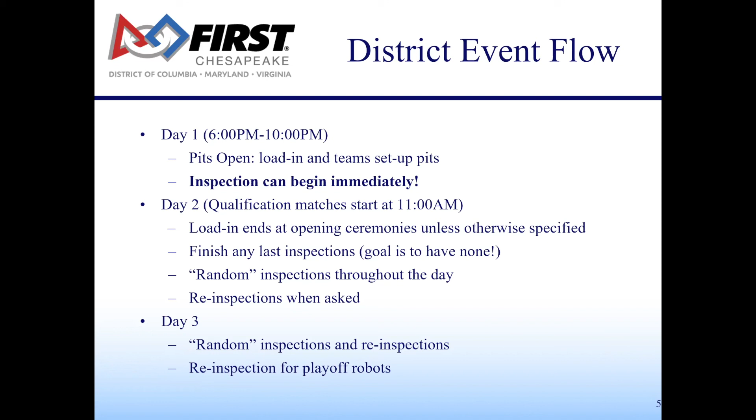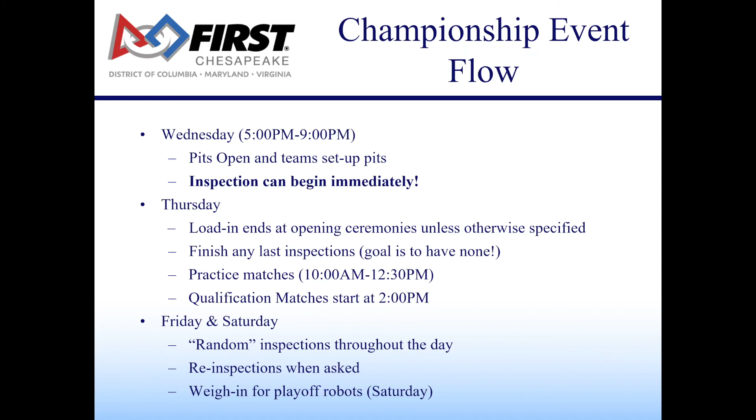For the championship event, the flow is very similar with the exception that it's an extra day. Pits open at 5, you can inspect immediately. The load-in ends are always at opening ceremonies. We have our practice matches from 10 to 12:30, and then we have basically the same process through the others.

The key points, things that I like to emphasize as much as possible: first, please start the inspection early.

One of the nice things about the no-bag rule is that we don't have to wait until the event to inspect the robot. I'd love to have teams reach out and see if we can't get some on-site inspections.

One of the things I'm hoping to advocate for next year is more inspection days like we had two years ago. That was an amazing experience for everyone involved. We had everyone there, were able to work out problems with teams, and it gave me the opportunity to train my inspectors. So the hope is we'll be able to continue to do that.

Chesapeake District was one of the most forward districts on that type of inspection. When they opened early inspections about two years ago, we had the most teams pre-inspected by far. To be clear, pre-inspection just means we look at it—there's nothing about the process that lets us speed up anything during the actual event. It just means that if there's a problem with your robot's frame, or any other type of compliance issue, we can look at it very early. So reach out—my email was at the beginning of the presentation, and I'll make sure Don gets this slide. Just do what you can.

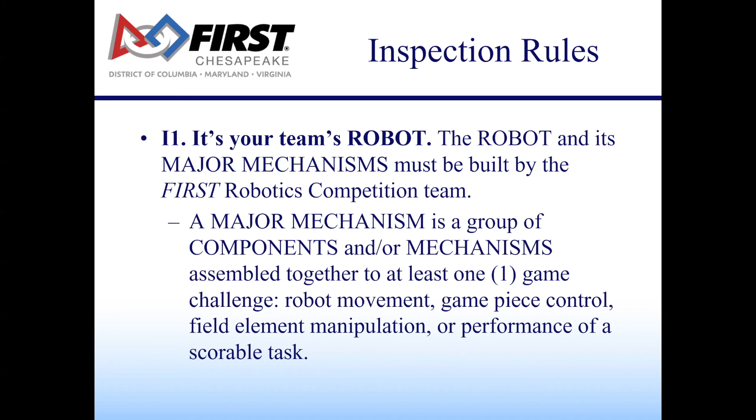This particular rule has caused a lot of consternation in the past, and my philosophy is that it's not there to prevent teams from helping each other. If a team needs help, like happens every year, they get swarmed by other teams there to help, and I love seeing that good work. The end result is a mechanism comes about, and I'm not going to demand who worked on it or what happened. What I don't want to see is a team with an array of literal scoring mechanisms coming over and saying, 'Okay, you're on an alliance, bolt this to your robot.' That's what I1 is intended to prevent.

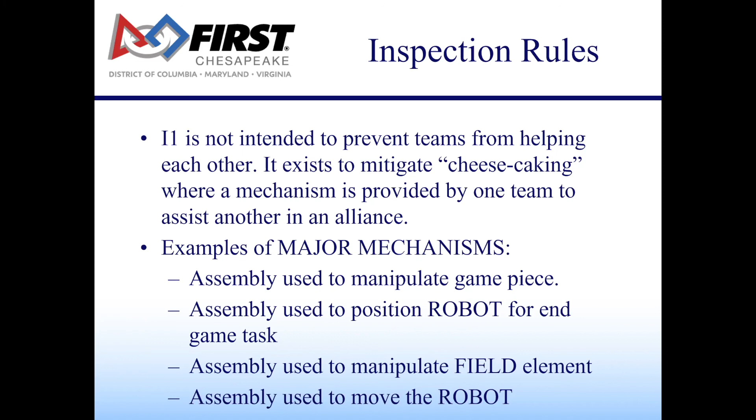There are some examples of major mechanisms. Things that are not major mechanisms include gearbox assemblies, COTS items, and any subset of a major mechanism. If you try to exploit a loophole, that's still a violation of I1. If you give someone a box of parts and say 'put this together' and it forms a major mechanism, that's not going to work. Realistically, this is mostly self-reported or seen by other teams, and as long as you maintain the spirit of the event—not providing complete assemblies to other teams, but instead helping repair the robot or working together—that's fine.

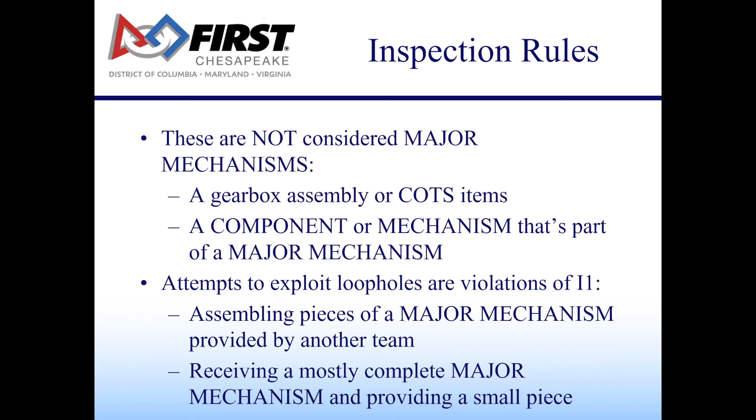I3 says bring it all to inspection. Sometimes, not often, we see teams with different configurations on their robot—a series of mechanisms that can perform task A or task B. What I3 basically says is any robot up to 150 pounds can be inspected at once, in any combination of mechanisms. As long as that 150 pounds of robot mechanisms is inspected, they can be used together. Now, any configuration you actually use has to weigh less than 120 pounds.

If I know that configuration A and B together weigh 120, but configuration B and C weigh 135, and I see you with configuration B and C, then that's going to be a violation and probably very bad for your team, because you'll be playing with a robot that wasn't accepted or hasn't passed inspection.

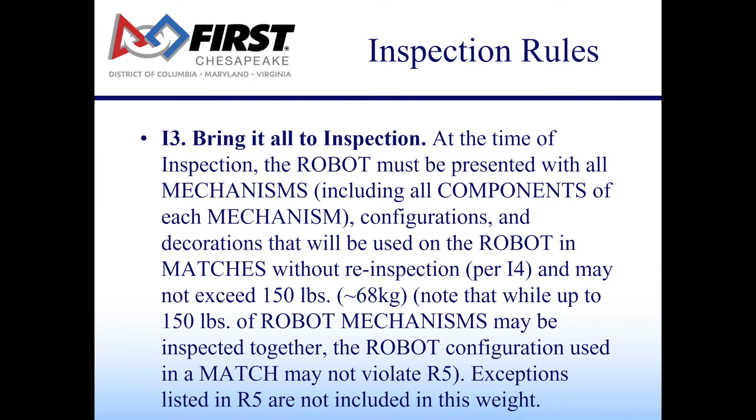But the goal here is to try to minimize the amount of hassle that we have going on. If it's been inspected within that 150 pounds of inspected items, then you can add it, remove it, reconfigure. You're fine.

If you modify your robot after your most recent passed inspection, please call us over to reinspect. When we say modify, we mean significant changes to the robot, physical changes, like drilling holes or changing mechanisms for new ones. If you're using fasteners, markings, or doing an identical replacement, that's not a reinspection—that's a repair. Also, please only bring one robot to the event.

If we see more than one, then we have to take one. So, the initial inspection process.

First thing we do: you bring the robot over, you remove the battery and the bumpers, you put on all your mechanisms, and you weigh it. We weigh the bumpers individually, add all the mounting hardware. Please don't step on the scale—the scales are older than most of our students at this point.

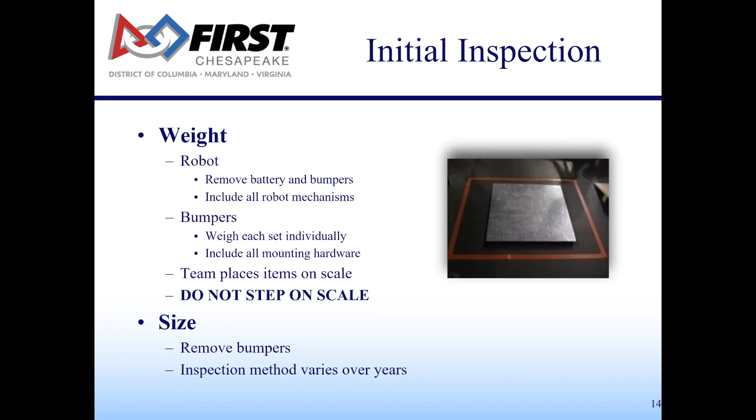For sizing, usually it's without bumpers. Whatever the method is, we deal with it. We try to have a box or something available so we can just kind of visually check it and move on quick. After the initial inspection, we move on to the pit.

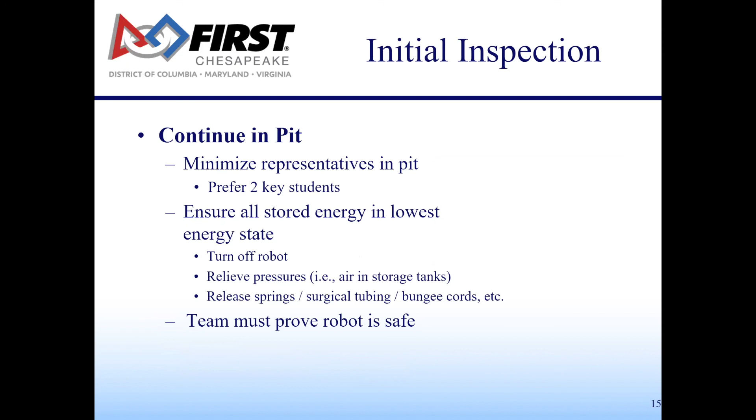We try to minimize how many representatives are in the pit. Ideally, we'll have about 2 students. We want to make sure the robot's in a safe condition, so we turn off the robot, minimize all the pressure, and put it into a low energy state. Once you have proven that the robot is safe, then the inspection can begin.

Bumpers are always fun. I don't know what it is about teams that can make these amazing robots with advanced programming that can't do plywood and pool noodles, but it always seems to be a challenge for some teams. But it's part of the robot. I don't think FIRST is going to go near any events that don't require bumpers anymore. They're here to stay. They're never going to go.

The construction's very simple: 3/4 inch plywood, pool noodles, that nice durable fabric cover, and then a proper display of the team number.

I find a lot of times that with a team that has a good robot, if they felt kind of rushed, the bumpers are usually the last thing to think about. And often that leads to something that's not necessarily the most securely fastened and easy to remove. For me, securely fastened means that when I move the bumper, the robot moves with it—there's no play.

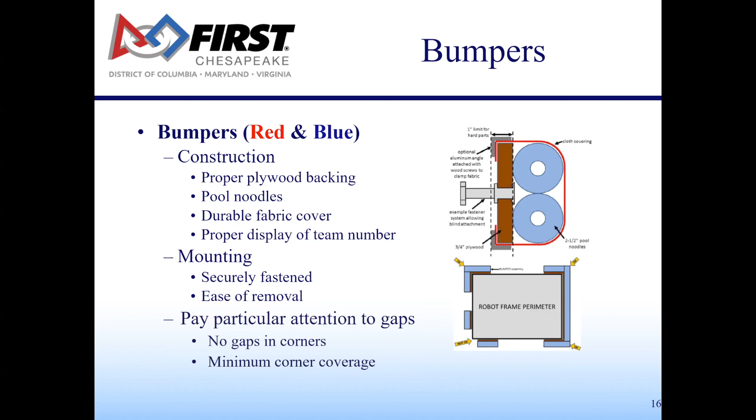Also, every year there's been rules about gaps in the corners. You're not allowed to have them, and there's a minimum 1/4 inch spacing or a maximum 1/4 inch backing between the robot and the frame perimeter. So if you can keep an eye on those things and check it aggressively, that'll be best for you, because bumpers are often very hard to fix due to the way they interface with the frame.

They're not an afterthought. They're mandatory. Your bumper can fail your robot just as easily as the rest of you.

Try to avoid bumper covers or convertible bumpers. Very rarely do I see them done well. I know that FIRST has done a pretty good job of changing the rules so that if a thread from a bumper is touching the floor, it doesn't disqualify you anymore. But the bumper system as it is right now, with the 2 swappable configurations, is pretty good, and the more you can maintain that, the better.

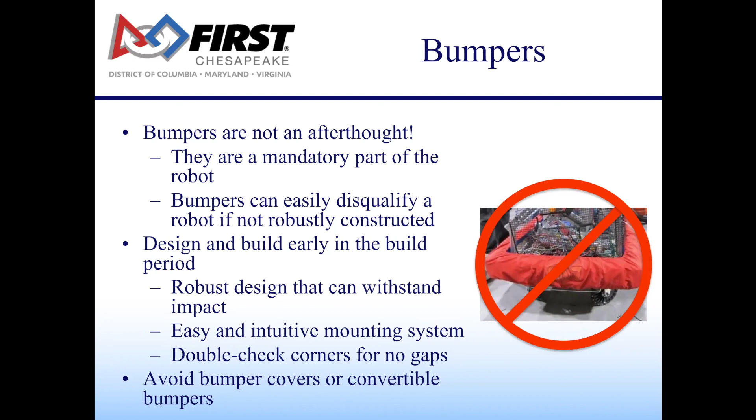Next up, we have mechanical inspection. I'm a mechanical engineer, so this is my favorite part.

The bill of materials—please have one ready. Honestly, my favorite thing is to just say, have it on Google Drive and share it with all of your students, so that when I say, hey, where's your bill of materials, no one's panicking. Someone just looks it up on the phone and shows it to me. I verify that it has the cost of materials, and I verify that it has the proper allocation of everything, and then we move on.

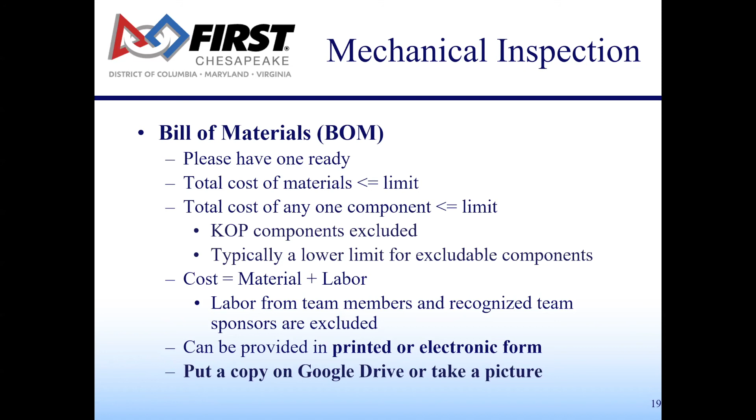These robots are pretty complex, and I'm just not in a position where I can perfectly analyze your bill of materials, but it does need to be there.

For me, the big things I look at are the hazards. So the first one being sharp edges and protrusions. I look at hazards to personnel or fields. I look at leading edges. I look at points. I look at undersides. My personal favorite are the improperly cut tie wraps that always like to demand the sacrifice of blood.

And I'm also a really big fan of looking at areas of concern. Any part that interacts with the game piece. If there's a part of the robot that can puncture or is designed to interface with the field, I'm going to be pretty careful about that. Anything near the breaker is of concern, because that's the thing that theoretically someone is going to be reaching towards in a panic. And if it's in an unsafe location, then we'll have to fix that. And then obviously near battery connections, because we want to make sure that there's no electrical hazards.

Another area of concern that we've had recently is the underside of the robot. On all of my inspections, I will make sure that the robot is lifted up so that I can look at the underside. I don't want to see any bolts sticking out. I don't want to see anything that's going to catch a field element. There's a 120-pound robot with a 1/4-inch bolt sticking out of the base. If that catches something like a cable line and it rips it open, the field could go down for a sizable period of time.

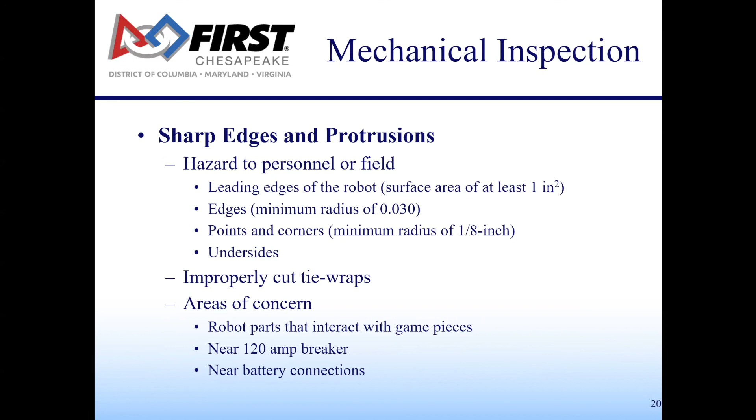Energy storage is critical. There's one approved battery or one approved style of battery. That's the only one you can have. If you're going to do any type of elastic energy, spring, surgical tubing, bungee cords, make sure they're properly contained. Your storage tanks need to be safe, and everything has to be safe to be around.

For batteries, I love to use either a 2-inch cinch strap or some type of secure battery tray. My philosophy is, if I can take the robot and turn it upside down and shake it and the battery doesn't come out, then you're good. No one wants to see a battery on the field. Please be careful about protruding bolts or other items that can damage the battery.

A couple of years ago, we had a team that had a battery case with 2 bolt heads that were in the battery region. And what happened is, when they installed the battery, the battery itself was actually resting on these 2 bolt heads. They were rounded, but it created a bit of a lever. And as a result, whenever the robot dropped, it actually started cracking the battery. And by the end of the match, all 5 of their batteries were leaking, which was a record for me. I went from having never dealt with a battery leak to having 5 in a single event, and that was great.

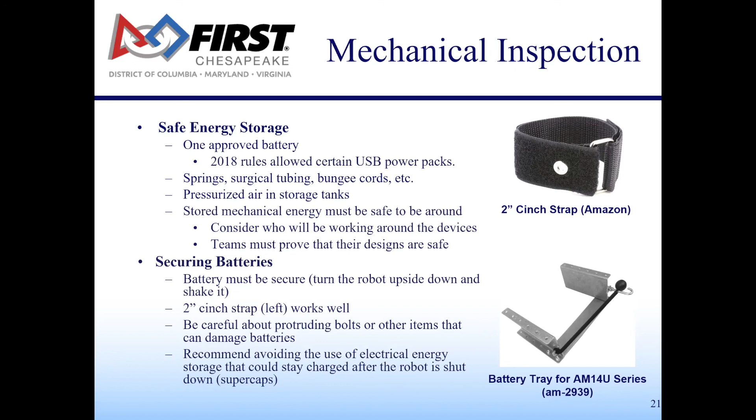If you happen to use any capacitors, please avoid having them be charged after the robot is shut down. Pneumatic storage. I am a huge advocate for properly and rigidly securing pneumatic storage tanks. I don't like seeing them flop around. Please avoid using cable ties or tape. You can't use tape because it's illegal in pneumatic components, because that's the rules. Cable ties have a tendency to stretch.

I'm a much bigger fan of seeing things like brackets or mechanical, physical restraints, as opposed to something that can stretch. Please don't use things like hose clamps that'll cut into the storage device. If you're using a lot of air, you don't have to use a Clippard tank.

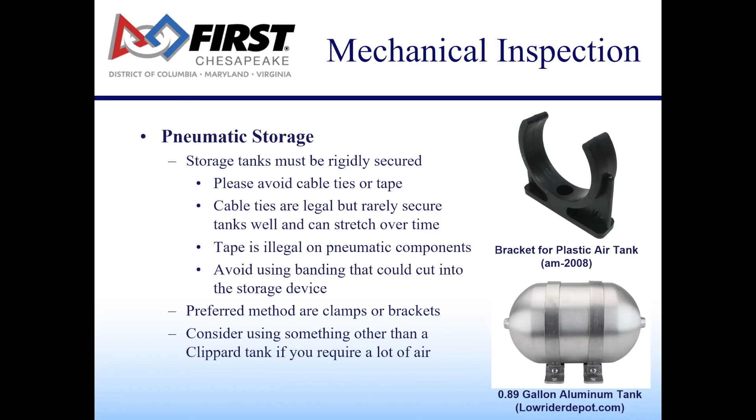One of my favorite things is to look at a website like lowriderdepot.com. I just found this place a few years ago, and they have these aluminum tanks that they use for things like the pneumatics on a car, and they actually hold more air for the weight than an equivalent Clippard tank, because they're aluminum. They're various sizes, but they're a lot more efficient, and they have these nice physical brackets, and they have multiple mounting ways. So if you're going to use a pneumatic system, consider thinking outside of the Clippard tank and seeing what other options are available.

Some mechanical recommendations: please clip your cable ties as short as you can. Every now and then I have a team that thinks it looks really awesome to have their cable ties cut at a 45-degree angle, and it bleeds. It makes me bleed. Just have your students run their hands over every part of the robot, and anything that feels sharp, just file it down.

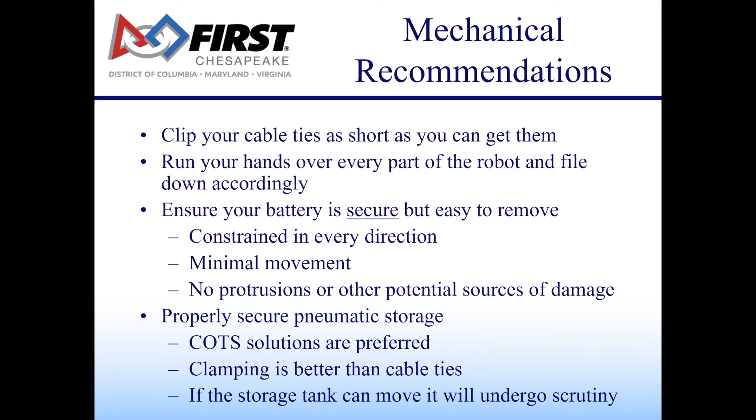The battery, please make sure it's secure but easy to remove. Constrain in every direction, minimize movement, just don't have any protrusions or potential sources of damage. And please secure your pneumatic storage. Ideally a COTS solution. Clamping is better than cable ties. If the storage tank can move, it'll undergo scrutiny.

Ballast. We haven't had a lot of ballast recently, but if you need to have ballast, it has to be in compliance. That means it can't be an additional battery and it can't be a threat to the field. So no uncoated dive weights. That's actually more of a thing in Florida than around here. No exposed lead. And try to avoid things like containers of loose fasteners or ballast.

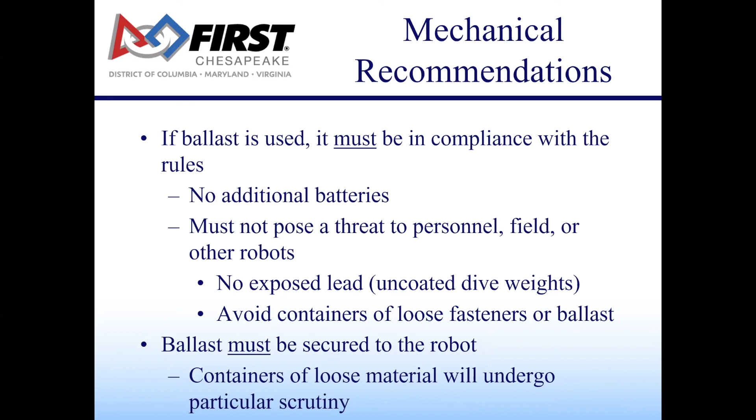I forgot which event it was, but someone had a glass beaker full of lead shot at one event, and that was a no. If you have ballast, it's got to be secured to the robot.

It shouldn't be hidden. Just design for access, in case a stranger has to deal with it. At the same time, consider the potential for what other robots and the game pieces can do to disable your breaker. If this is a game where balls fly all over the place and can land on your robot, then a breaker prominently located at the top that could be turned off may not be the best thing in the world, or you could shield it somehow.

The robot radio, just get it programmed immediately so that that's not an issue. Try to mount the radio high and away from metal. Please don't clamp the radio, for example, with cable ties. Depending on the radio, there may be a very thin margin between the grounded plate that forms the antenna region and the board itself. And if you compress it too much, you can cause a short.

We've had a lot of success with adhesive hook and loop tape. If you do have to use cable ties, and I'm not saying you can't, just don't encourage your kids to clamp it down mercilessly. Try to make sure that it has at least a little bit of give. Previously, there's been issues with radio power. You can use both a barrel adapter and power over Ethernet. I highly recommend power over Ethernet.

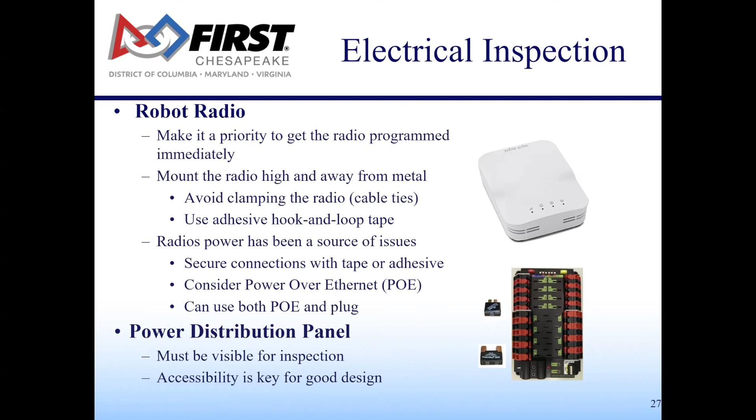Electrical inspection with custom circuits. Any component of the robot other than the listed ones is considered a custom circuit. Any active electrical item that is not an actuator or core control system item can't produce more than 24 volts. They can't directly alter power pathways. So for example, you can't put a custom circuit in between the motor and a wheel, or in between the power controller and the motor.

You can monitor voltage or current, but you can't directly control motor controllers or relays. It can be connected to the CAN bus, but it can't interfere with, alter, or block communications among the control system itself. If you have a remote camera that broadcasts a Wi-Fi capable signal, it has to be pre-approved by FIRST. It's better just to not have that happen.

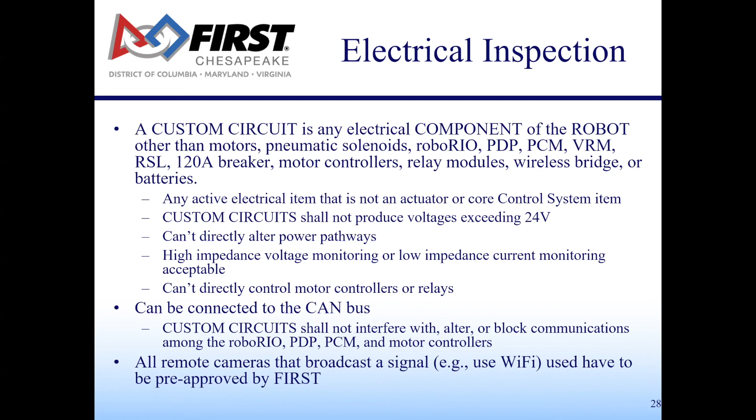Electrical recommendations: the best thing you can do is have clean, well-labeled wiring. It makes it easy to inspect and easy to troubleshoot. I like using the Anderson power pole connectors - they're pretty reliable, they have nice little clips, and they're easy to pull apart.

I recommend using low gauge wire. Just because the system says you can use 12 gauge wire doesn't mean you have to. I like using 10. McMaster Carr sells something called Easy ID low voltage cable - it's a red and a black wire already bonded to each other. If you're going to do battery wire, there's no reason to just use 6 gauge - maybe go 4. There's an ultra flexible battery wire also from McMaster, which works really well.

During your own self-inspection, look at every single connection you have and pull it just to make sure nothing is loose. I like using perforated plastic sheeting for electrical mounting. McMaster Carr sells high strength PVC plastic perforated sheets - that's sheeting about 1/8 of an inch thick with a 1/4 inch hole every inch or half inch or so. It's easy to mount components on it and adjust as needed.

And if you've got 50 bucks lying around, consider getting a hydraulic crimper. It will absolutely bond the daylights out of your components and make it a lot harder for them to pull out.

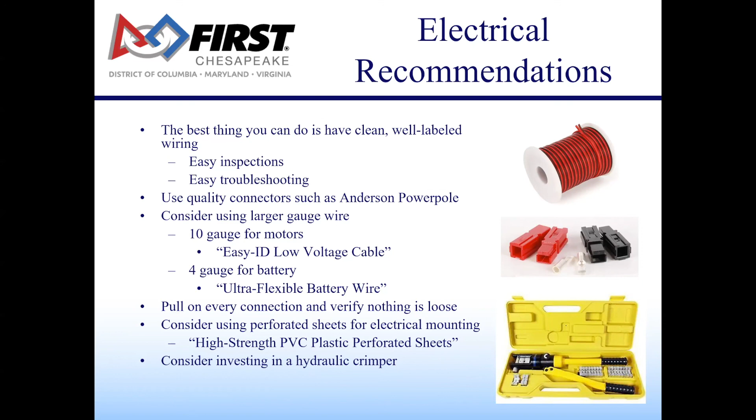Regarding electrical recommendations, please avoid making any assumptions when it comes to motors, solenoids, or custom circuits. Use Q&A, feel free to email me. Pre-inspections are great. A good example is automotive motors, although I'm not sure how much that's an issue nowadays, but every now and then I run into someone who says they have an automotive motor. The bottom line is I will require evidence that the motor is actually for automotive use. It can't just be a motor that is also possibly used for automotive use - it has to be a motor that is actually used for cars.

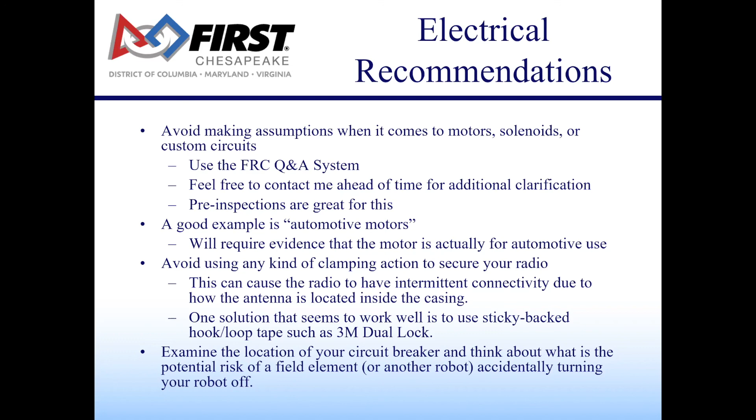Just try not to clamp your radio - again, I like using Velcro. And with the circuit breaker, again, think about what would happen in an emergency situation. How quickly can a stranger turn your robot off?

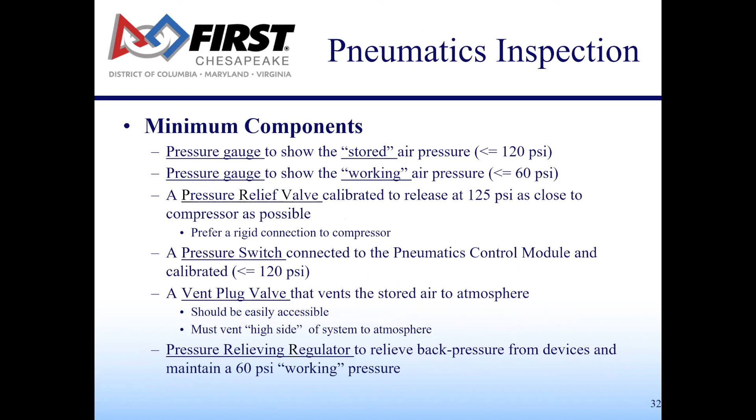Pneumatics - everyone loves pneumatics. The minimum components of the pneumatic system are a stored pressure gauge, a working pressure gauge, a 125 psi pressure relief valve, a pressure switch, a vent plug valve, and a pressure relieving regulator. Please do not modify your pneumatics. You can remove mounting pins from the cylinders of a pneumatic cylinder. You can modify the wiring connected to the control system by adding a connector to it. Please don't paint or tape over components.

Compressor: any type of compressor is allowed if it meets the specs - just show me the documentation. The kit of parts compressor is typically undersized, it's only 0.88 CFM versus a limit of 1.1.

Note that if you have a lot of air flow in your system, you can cause a lot of heating. I think it was the Andy Mark 1.1 CFM compressor - I was doing an event 3 years ago where the compressor was working so hard that it melted the plastic tubing it was connected to. It actually caused a little hole that caused a pressure release.

You can only have one compressor. It can be off board, but it must still be controlled by the robot, and the minimal pneumatic system must still be on the robot.

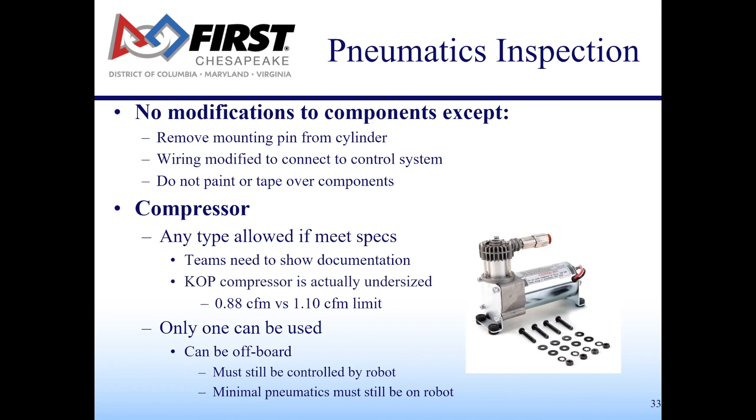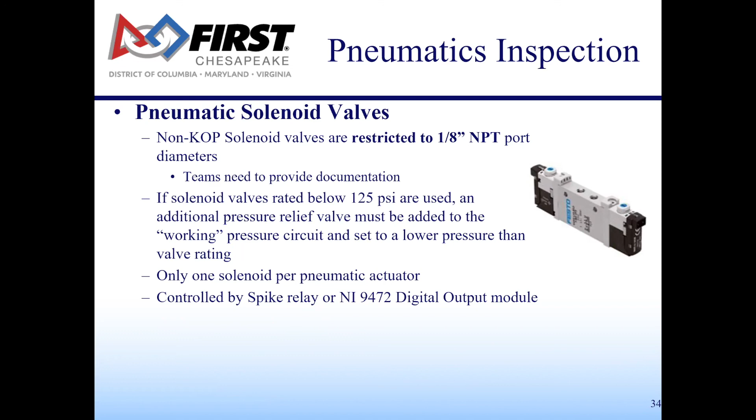I highly recommend performing your pneumatics check before inspection. Check that the high pressure shows less than 120 psi. Check that the working pressure shows less than 60 psi. Make sure the compressor stops at 120 psi. Verify that the pressure relief valve works.

Short the leads of the switch and make sure that the pressure relief valve relieves at no more than 125 psi. I highly recommend using a static pressure relief valve like the McMaster Carr model shown there. If you use that, then you don't have to worry about setting it - you just put it into the system and it runs.

Try to treat your pneumatics like an electrical system. Cleanly lay it out and label your tubing. The easier it is for me to inspect, the easier it is for you to troubleshoot, so try to simplify as much as possible. That aluminum tank I showed previously was the equivalent of six Clippards. Make sure your gauges, regulators, dump valve, relief valve, and switch are all easily accessible. Gauges in particular, because during events I frequently check them to make sure your working pressure is less than 60 psi.

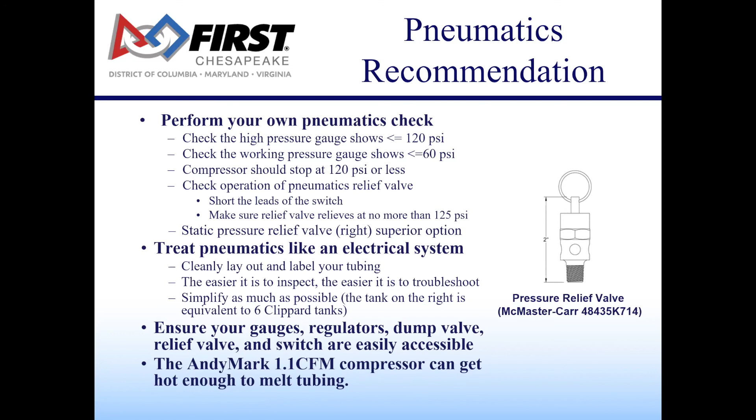We are continuing to find these white Clippard tanks. There's fewer and fewer of them, but if you have a white Clippard tank with a threaded end, or someone gives you one, throw it out and recycle it. It is not allowed for this event, because if you are overly aggressive in tightening the threaded end with a fitting, it will crack and could explode.

Follow-on inspections. You've passed inspections, you're playing games, what happens then? Well, if you make a change to your robot, have an inspector recertify it, with the exception of fasteners, changing your code, doing swaps, or any modification within previously approved subsets. If you're not sure about something, just ask us. We're friendly, we like talking to people, and usually by halfway through the event, we're just kind of hanging out.

Finally, disputes. This is important, especially for the mentors. No system is perfect, so there will always be disagreements. If you disagree with the ruling of an inspector, please contact the LRI. Robot inspectors are responsible for inspecting robots; LRIs are responsible for customer service. Every single LRI is trained in how to communicate with you, the customer, and how to address any issues that come up. If you feel there is a problem between you and your inspector, don't engage them directly, just go to the LRI.